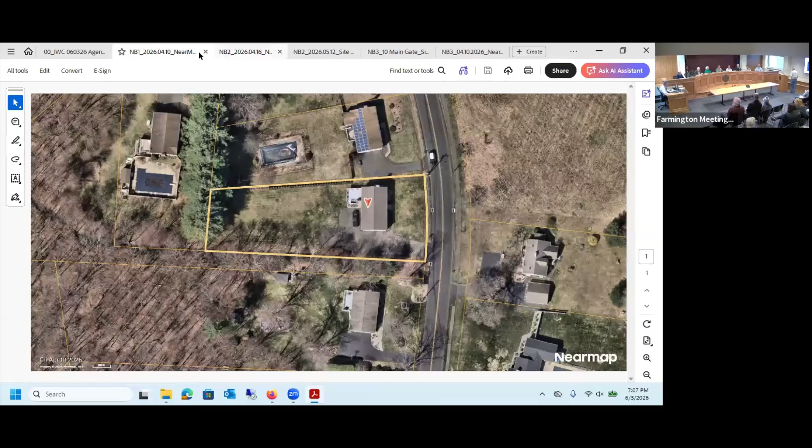Good evening, Jeffrey Moore's, 152 Wood Pond Road. I have an application in to put a maintenance path in our backyard. I think you already have a summary of it. We're on Woodridge Lake. It's about a 23-foot drop from the patio down to the shoreline. We've controlled for erosion by putting in various interrupters, terracing, I guess you'd call it. The drawback with the terracing down on the...

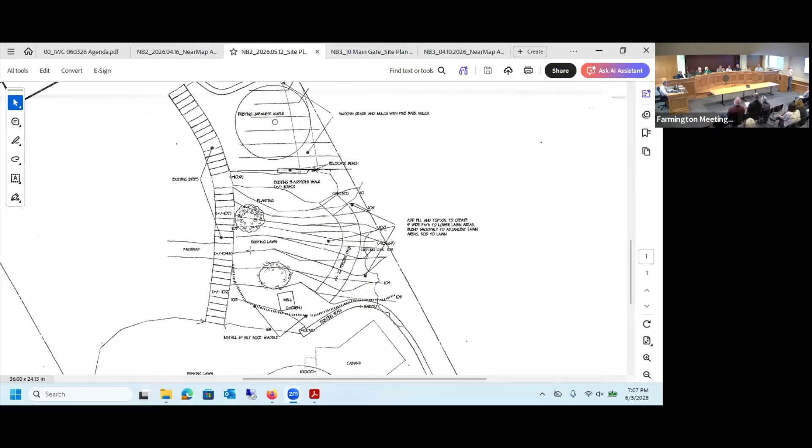Not sure, I can't really make it out too well here. You look behind you, behind you too. You can see to the right, there's a crescent-shaped proposed path.

We need that because we can't get lawn equipment down there. As we get older, we've looked into having the lawn done, and none of the landscaping people will do it because they can't get equipment down there. One of the other things is we get loads of snails and algae, waterlogged, and we have to bring them up the steps. So putting in this crescent-shaped curve would give us enough of a path that we could bring something wheeled, like a wagon or a jitney. So that's what we're asking for.

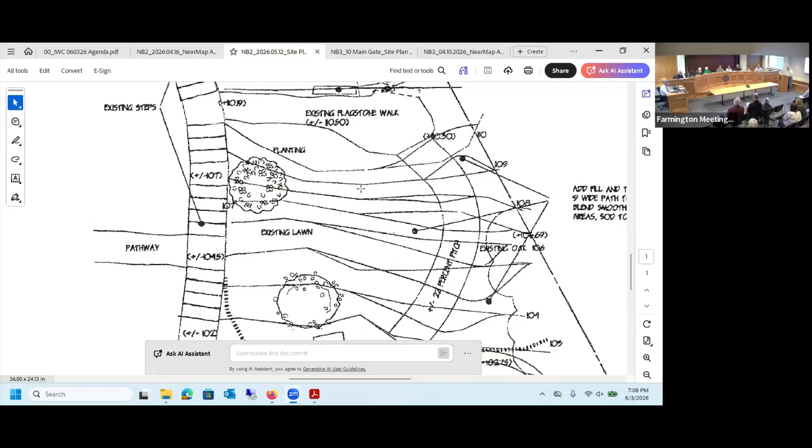The second part is to install a dry well at the end of the driveway. It wasn't clear as to whether this was even in wetlands—it seems to be right on the border, but we've applied for it just to be safe. We're getting runoff from the adjacent property, and we also want to repave our drive, so we'd like to put the dry well in. Thought it'd be a good idea to put the application in at the same time we're doing this.

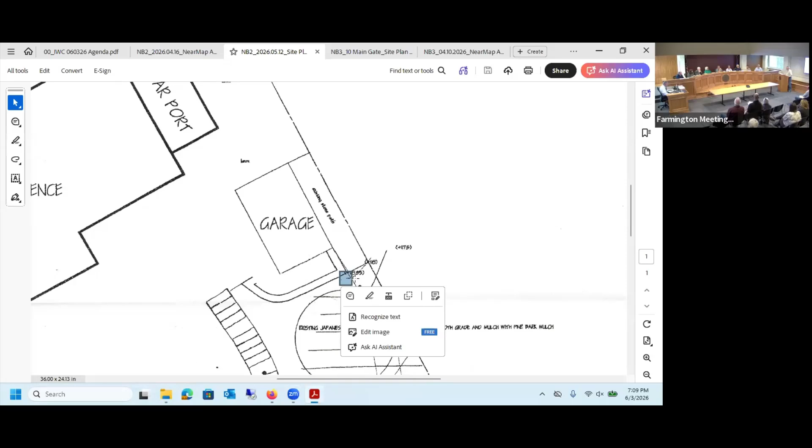Okay. So there isn't going to be any excavation to change the elevations of the ground to make the pathway fit. The only excavation will be for the dry well at the top. To put in the path, we'll be using fill, approximately 30 cubic yards, according to my landscaper. Okay, and that will be sodded afterwards, and of course we'll put in erosion control until that's all done.

What is the pathway going to be? Is it grass or is it stone? Yes, it will be grass. Okay.

And the drainage, I saw you had a detail of the drain. The contractor is going to be putting in that drain as well. Yes, we'll probably do it at the same time. Actually, it's a matter of getting things coordinated. We don't really need the drain until we do the driveway, but we don't want to put a fresh driveway down and then bring in the equipment to do the pathway.

So we're looking hopefully at the possibility of putting in the drain. He can use the soil from the drain for the pathway, which means he won't have to lug that around, won't have to lug it away, and we won't have to bring in additional fill. The question is, I've got to try and get this coordinated with the paver to make sure he gets the location correct.

Okay, and the... well, I'm not sure about that. Let's pull in the commission and see if they have any questions. Andre? Pretty straightforward, I have no questions.

Okay, Rich? On the drawing here, it says you're going to have a 22% pitch on your sloped surface. That's what he's calculated, yeah. I'm not sure that at 22% pitch, the sod will stay in place unless you do something to reinforce it. I can take it up with the landscaper. He's done work for us twice before. It's been satisfactory, and he's done quite a bit of work around the lake as well.

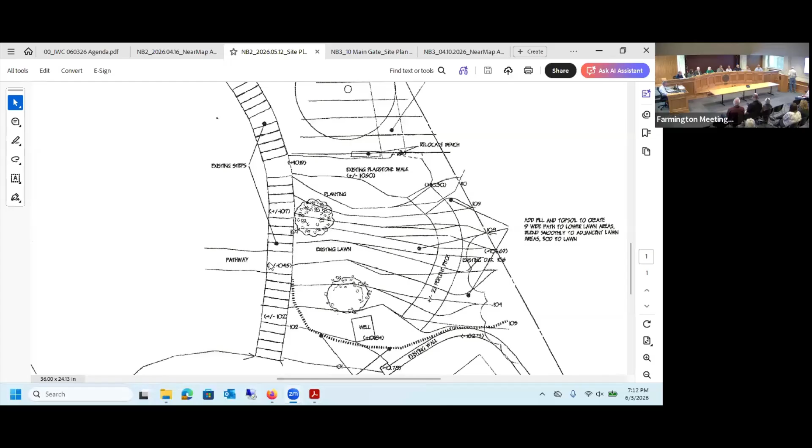Okay, Robert? A few questions. Where is your septic system located? The septic system is... yes, it's on that area, the other side of the lot. Not yours. Yeah, no, that's not a problem.

Okay, and similar to the concern that was raised by Commissioner Berling, I think you probably have to look at a geotextile mat or something, because that's a fairly steep slope. And should the application be granted, if you have problems with ongoing erosion, you may need to switch to a different process. Yeah, that's something that I will be concerned about as well.

And historically, how have you gotten the equipment down there? Some carry downstairs? Well, before the ground cover grew in—well, I was quite a bit younger then too—you could get a wheelbarrow down and get a push mower down. Now it's overgrown so much, we have to run the push mower down the steps, and it's like 39 pieces of stone. So it's getting tougher and tougher.

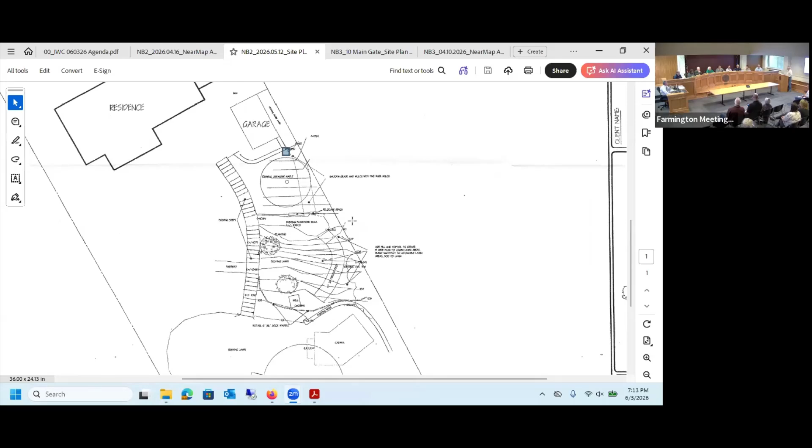Understood, thank you, that's all my questions. Thank you. Okay, Dave Fox, how far is the lake from the end of the path? Between 44 and 50 feet. I think Mr. Sear estimated 50 feet. I think we taped it off at a little over 44. Okay, that's all, thank you.

Mark? You mentioned dealing with erosion. You would have to use erosion control in the area where you're going to be doing all this fill-in. What type of erosion control are you using? I think they call it wattle—it's straw mats that are sort of wrapped up. I was going to say that's probably what you're going to need. Yeah, just, if you say it's a steep pitch as it is, that's what you need. Okay, thank you, no further questions.

Okay, Alana, I have no further questions. Frank? No further questions. Okay, no further questions. The chair will entertain a motion to accept the application. So moved. And a second, please. Second. All those in favor say aye. Aye, aye. Opposed? Abstain? Motion passes.

How do people feel about the site walk and the significance? I'll start with Andre. I think that's a little significant pitch, but I don't think it warrants a site walk. No significance, no site walk. Rich? Yeah, I would agree. Okay, Mark? Same. Robert? I'd be okay if we don't do a site walk, but given the steep slope and relatively close proximity to the lake, I would actually favor a site walk. Would not be concerned if we did.

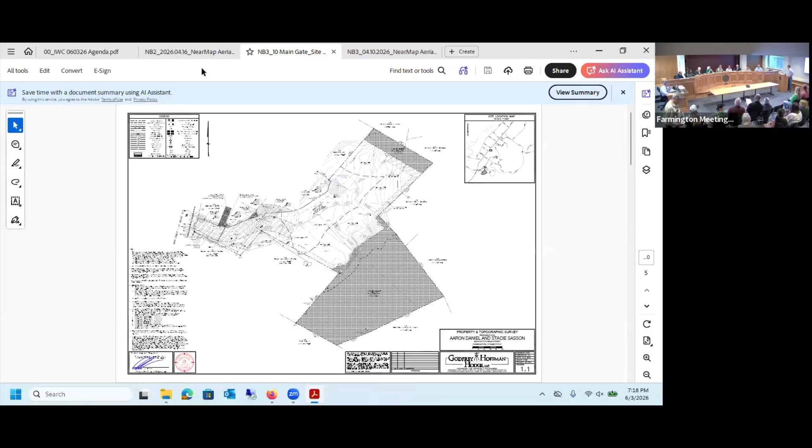All right, 10 Main Gate, Jason Levesque. Bruce, Lance, members of the board. I'm working as an agent for the current owners. It's been quite some time since I've been here. If you recall, I proposed a 4-house subdivision there - some of you may have been on the board.

It's a new proposal. I since withdrew the subdivision, and I'm now proposing a single family house with a pool house, a pool, and a septic system. So we're not doing sewer, and we're going across the culvert - only a minor amount of utilities going across that culvert in front.

The site plan doesn't have that on there - I think Bruce put that old plan in there. Sorry, I think you put the old plan in. Yes, I did. Do you want that up now? Yeah, because it's going to be a minor disturbance in the upland going across the culvert.

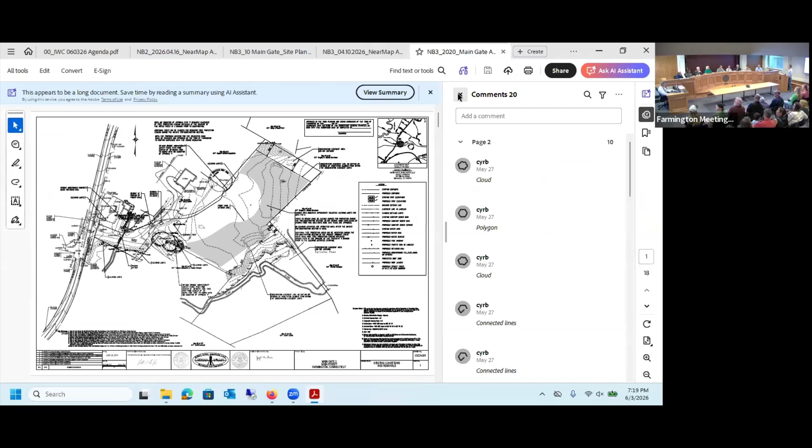So from Main Street, I'll be bringing in water and gas - those are stubbed in currently. So I think we calculated about 0.033 of an acre disturbance there, going across on the existing driveway, and then obviously paving the driveway up to the proposed house. So you can see a big reduction in disturbance in the upland review compared to the old proposal.

The existing conservation area stays in place, so no disturbance in the actual wetlands. Bruce, you can go back to the proposed site plan please. You can see that the dark dotted lines are the upland review right there. Most of the disturbance is the proposed pool and pool house - nothing touching the conservation easement, you can see that in the dark gray area. And even the septic system is out of the conservation and wetlands area.

I'm sure I missed a couple key points there, so if you guys had any questions for me.

What is the plan for the property area to the north - is there a future possible house placement there? No, we got rid of all the lots. After wetlands, when we passed the subdivision, we had the lots - now it's all been put together into one. So all of these lots here, 1, 2, and these will all disappear - so yeah, it'll only be this house along with the driveway to the house.

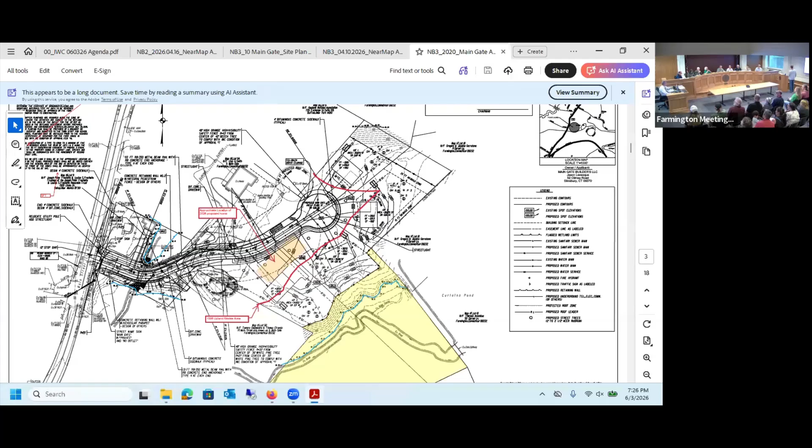So the septic system is where? Right there, right here. And then the infiltrations, the stormwater and roof drain infiltrate there's one on that. Yep, right there. Got it, great, thanks.

In the pool, does the pool have any underground drain? Is there any other point discharge? Anything below the pool, is that going into the infiltration? No, infiltration, that'll have to be emptied, pumped, and taken off site.

But you don't have any foundation footing drain, anything like that for the pool that has a point source? For the pool itself, not necessarily for the pool itself.

We have yard drains, so kind of, see the grassy area, maybe to the left of the pool. So yard drains in there, right?

Because obviously we're going to keep the grades somewhat level, so yard drains there, yard drains there, corner there, all leading into infiltration.

And then roof leader and everything going out to the front. Great, thank you. David, no questions.

Did I ask you, Mark? Yes. Yeah, okay, I'm sorry.

Alana? So the paving around the pool, it looks like, is that brick or? More than likely, just for purposes of the plan, it'd be like a paver or a natural stone. More than likely it's going to end up being a natural stone.

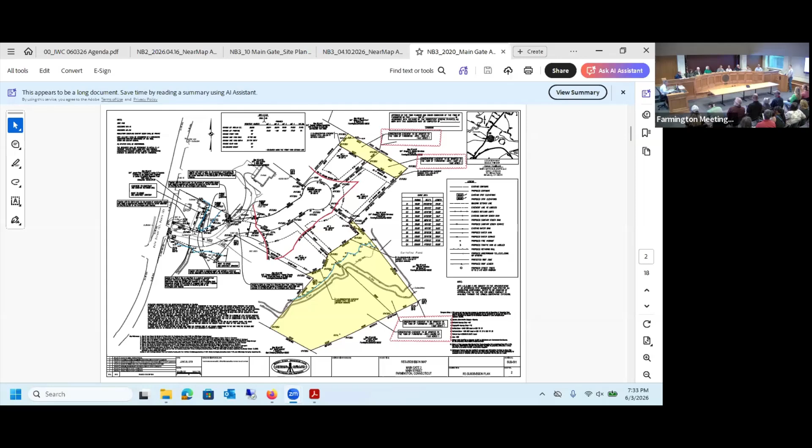Would it be possible to get the house roughly staked out? Yeah, I'll get it roughly staked out. That way you guys can look at it. Do you want the full box, like the pool house? That probably makes more sense - just the four corners of the house and the pool house.

Did you ever mark out the conservation easement in the back here? No, that never got done. It's delineated pretty well with the topo there. So I just didn't know if you already did it. That'd be a great way to work our way back from. But honestly, a stake or two, or a flag there, would probably be helpful.

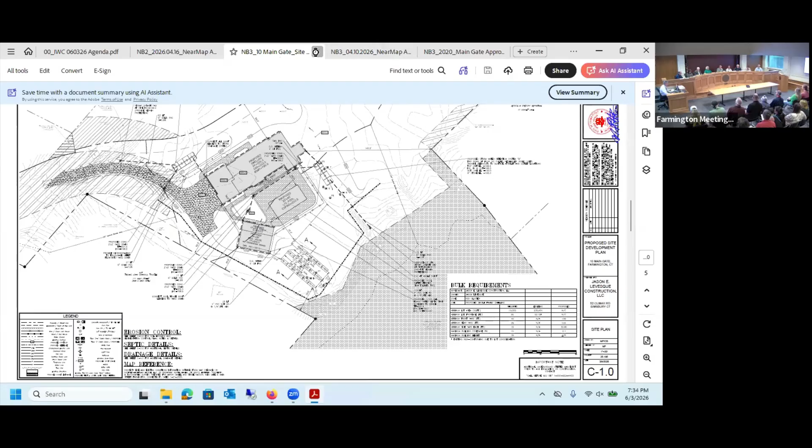We'll see you tonight - vote on the application. All right, you ready? Okay, we're going to reopen the public hearing. First one on 598 Plainville Avenue, JBS Developers.

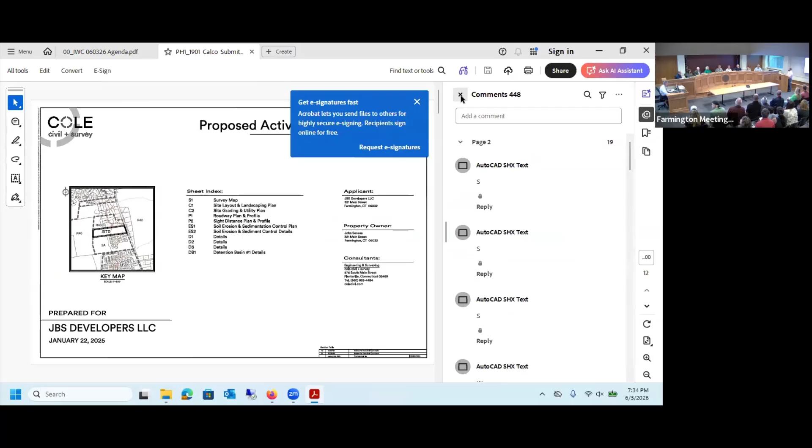Good evening, for the record, Brian Panico with Cole Civil and Survey, here on behalf of the applicant, JBS Developers. Just a quick recap - I believe at the last meeting we had gone through everything and answered all the public's questions, and we're just waiting on a referral from conservation.

You haven't made any updates to what was presented at the previous meeting, right? Correct. Okay, are there any questions? I won't bother to poll everybody, but are there any questions? Did we resolve the question of the elevation of the houses versus the water table? There was some question to that. That was actually included as part of the comments - there were some suggestions to tweak the house elevations on one or two lots. There's no questions from the commission.

Are there any public comments on this? Which one is it for? 598 Plainville Avenue. Any questions, any public comment for 598 Plainville Avenue? Are there any comments online for 598 Plainville Avenue? Got their hand raised? No one's got their hand raised. No one does.

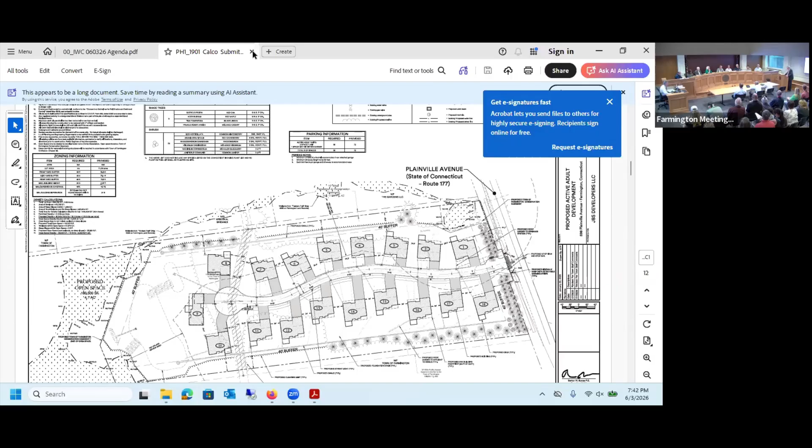You'll remember the hearing was opened on April 15th, continued on May 6th, again on May 20th, and again to tonight. We've provided Bruce with a written extension of time until your next meeting on June 17th, in which to close this hearing. Since the last hearing, we have submitted revisions to the plans.

We've also addressed comments received from the staff, the commission, and the public. Solli Engineering has revised the stormwater management plan to incorporate the so-called jellyfish system referred to at the last hearing, and provided detailed written responses to Bruce's staff comments. Bruce just finished reviewing those at about 5 o'clock this evening, so we haven't had a chance to look at those yet.

We'd like that opportunity, and certainly the intervener, the public, and the commission will need that opportunity too. So that's the request to keep the hearing open. William Kenny Associates has also submitted a wetlands mitigation plan, which came in Monday, with a detailed written report addressing comments received from the commission, the staff, the intervener, and the public, including further investigation of the presence or absence of the lizard's tail on the site, which was of interest last time.

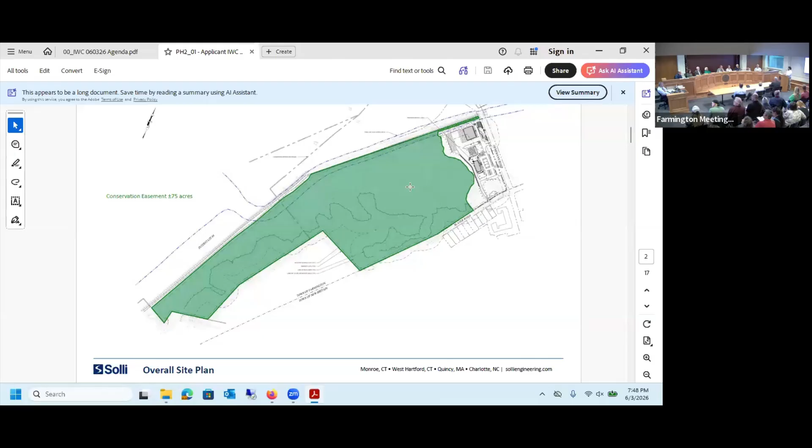So Bruce, if you could go to the next slide, please.

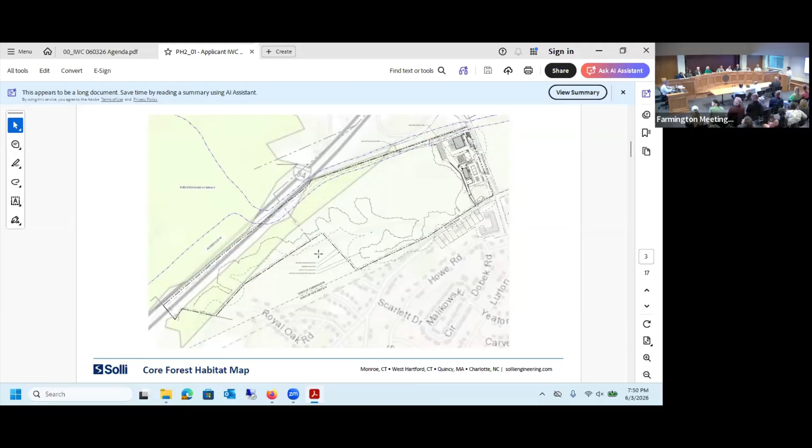Bruce, can you go to the next slide, please? So now I'm going to get into some of the changes that have been made to the design based on the previous plans we submitted. These plans were submitted last Friday, and the revised plans included some alterations to where the roofs for the gas canopy as well as the refueling station drain.

Based on the commission's suggestion, we have included the refueling station and the gas canopy roof drains into the recharge for vernal pool 1 that is down to the south. I know originally both of those roof drains were leading into our stormwater management system. By doing this, we are able to contribute to the hydrology of this vernal pool without reducing it as much as we were previously.

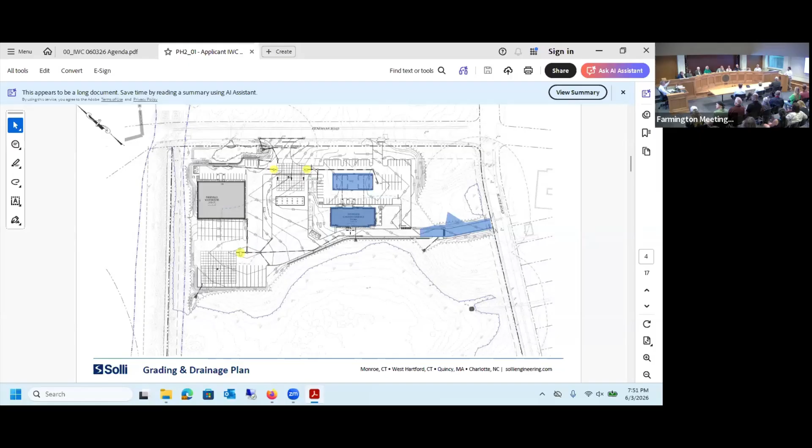Similarly, along the Slater Road access drive, which we talked about last meeting, we're including a tree filtration system that is capturing the runoff from the road portion. In place of what was previously there, a catch basin tied into the overall stormwater system. Again, this is also going to contribute to the recharge of vernal pool 1.

One of the other comments brought up by the commission at the last hearing was about the Slater Road discharge currently existing on site. There's an existing 30-inch pipe coming from New Britain stormwater that feeds into this property, and this water runs into the vernal pool area. We'll look at the watershed map again later, but this is the main contributor to the water source of this vernal pool. When we talked last time, the question was raised how we can provide some form of treatment to this water being directly discharged. So we are proposing to improve the existing conditions there. I'll get more into that design later.

The final changes we've been discussing previously were the replacement of the hydrodynamic separators with jellyfish filters from Contech. These have been fully integrated into the stormwater design now and included within the resubmitted drawings. There will be 3 of these filters on site: one for the large underground retention system at the back of the warehouse, and 2 at the front underground system.

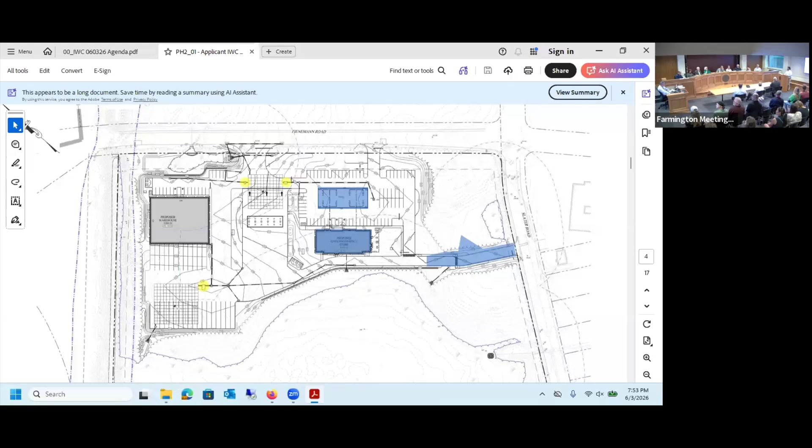The one other area I'd like to touch on is the area along Fienemann Road, that wetland pocket. One of the staff comments was about adding an additional catch basin along Fienemann Road to reduce the drainage easement needed. So I want to highlight that we did include an additional catch basin on the opposite side of the driveway from the previously proposed one. This captures road runoff directly from Fienemann Road, going from one catch basin into the other and then into the sump we're proposing as part of this wetland mitigation, which will be touched on more later. We're capturing this runoff from Fienemann Road, and the intent is to help improve this runoff, which is what's leading toward the mitigation efforts for this wetlands pocket.

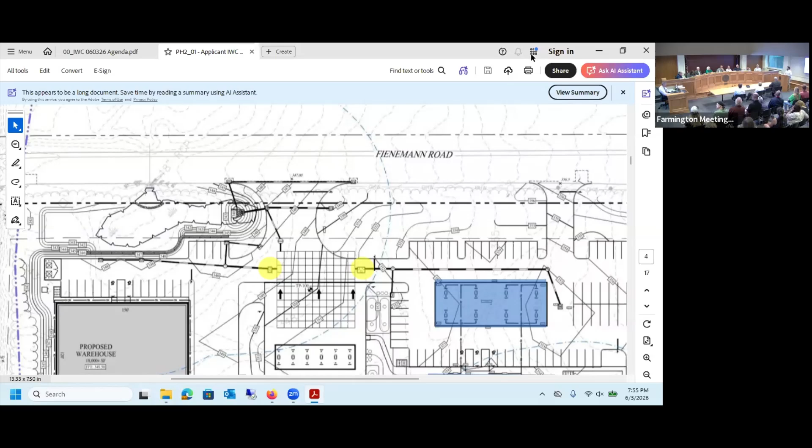The stormwater runoff from the site itself is going to be pre-treated and go through the retention system. We are going to maintain or reduce the overall runoff from the development before it gets into that wetland pocket. The intent behind this wetlands is there was an opportunity here to improve the wetlands that currently existed. As many of you saw on the site walk back in March, there was definitely a bunch of trash and debris, and the wetlands was not in the best condition. Our efforts here are to help improve that, as well as treat some of the Fienemann Road runoff coming from the town road.

Chairman, point of order. Okay, let's keep our comments to ourselves, please. Okay, thank you. Bruce, if we could go to the next one, please.

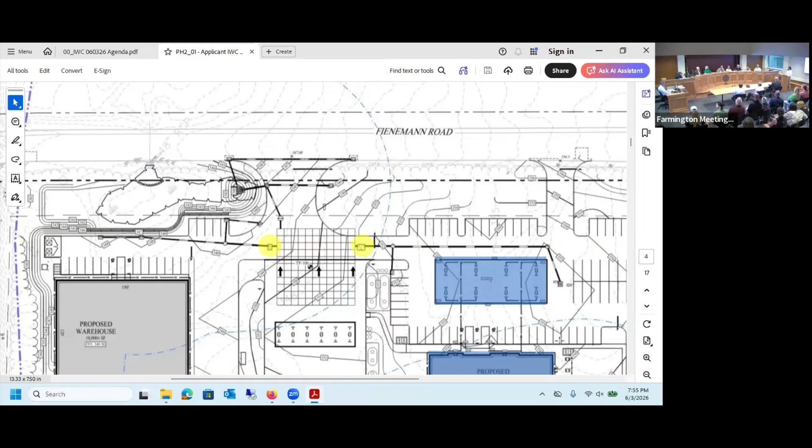I wanted to touch on the jellyfish filters we talked about at length at the previous hearing, and some of the approvals they've gotten at existing sites in the state of Connecticut where these units have been approved, installed, and are functioning. First off, these units have been tested by the Washington State Department of Ecology to meet their technology assessment protocol, called TAPE testing, and they have approved this unit through TAPE testing to a general use level designation. There are different designations for general use, conditional use, and some still preliminary and in testing. For this specific instance, they are looking at emerging stormwater treatment BMPs and testing them to see if they can be used, given conditional usage, or if they still need further testing.

The jellyfish filters themselves have been given that general use level designation. Per the Connecticut Stormwater Manual, any proprietary BMPs certified by TAPE for general use level designation, GULD, for pre-treatment and/or treatment and/or basic treatment are suitable for pre-treatment and treatment respectively in the state of Connecticut. So based on the GULD designation given by Washington State, these units are approved for use in the state of Connecticut.

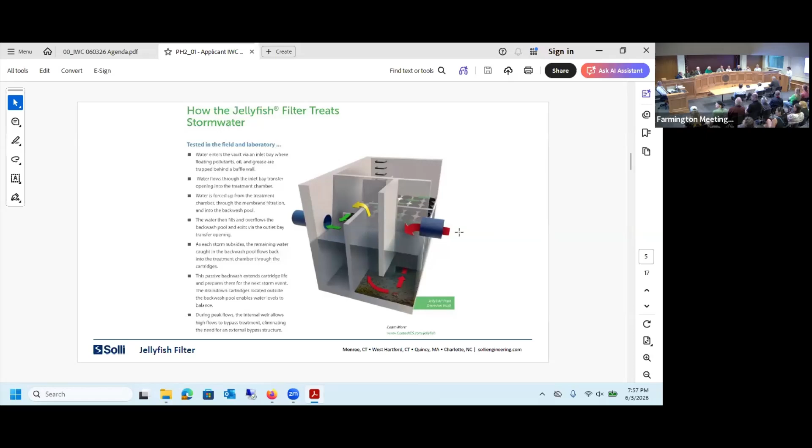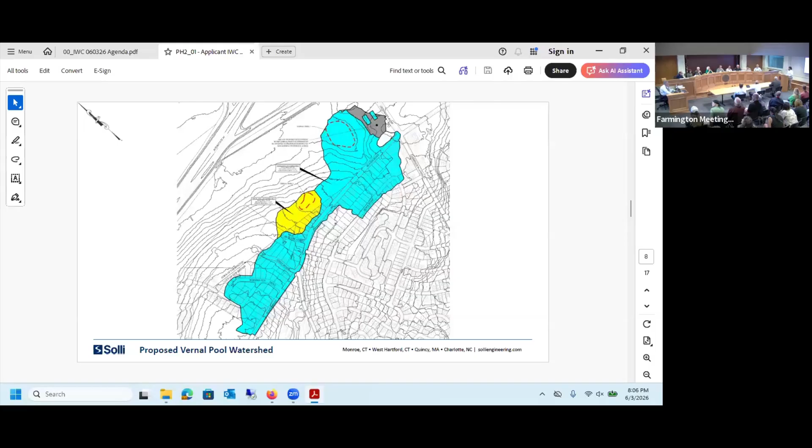Currently it's silted on the bottom. When I was out there, it was about 1.5 to 2 feet deep as a plunge pool, and then off to the left it flows into a stream.

The intent would be to bring this up to DOT standards for a scour hole, which is another term for plunge pool. So we would be increasing the size of the pool itself, as well as adding riprap, which would help with capturing sediments, energy dissipation of the water coming out of the pipe, and soil erosion control.

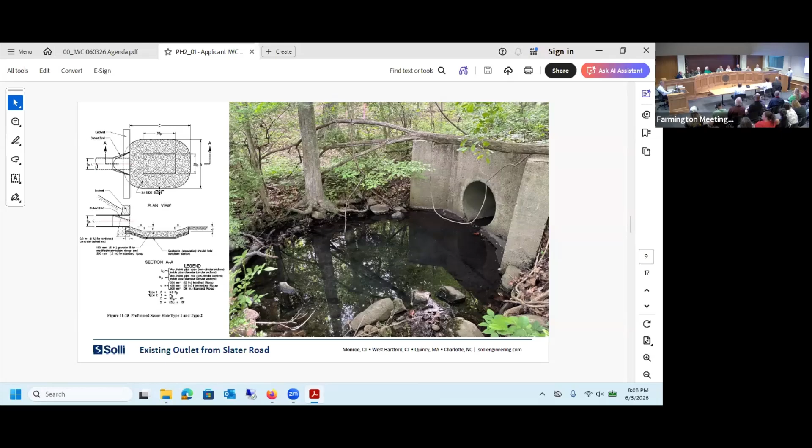Huh? Is it? All right, okay, I'll keep going then. The next one after this?

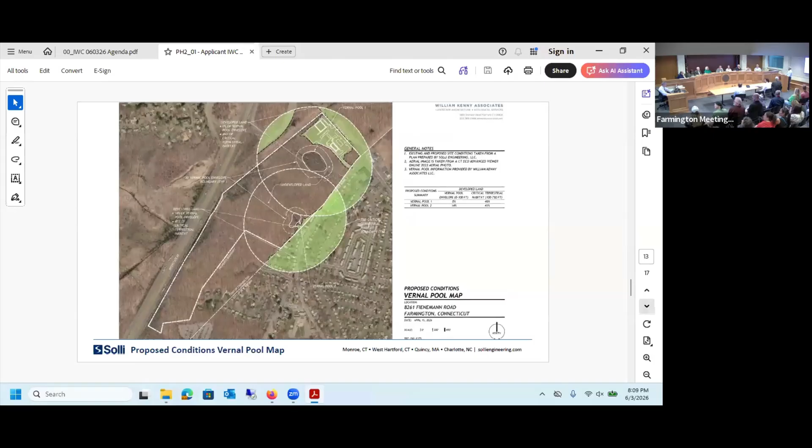Nonetheless, the modifications to the mitigation plan were very minor, based on the town comments that we had gotten. It's really just two. We added all of the different species codes to the trees and shrub plantings that we're proposing, as well as fixed one of our typos related to grading in the wetland area to be enhanced. And then we fixed up our wetland mitigation, wetland creation, and wetland alteration numbers so that we are in line with the most recent plans that Solli has. That's about it for the mitigation plan.

In addition to that, we submitted a pretty large and thorough report. We took into consideration comments that we received from the commission and the public, and packaged all that together. There's really four primary items in that I just want to go over and summarize tonight. If I don't answer any of your questions on those, I'm happy to go a bit more in depth.

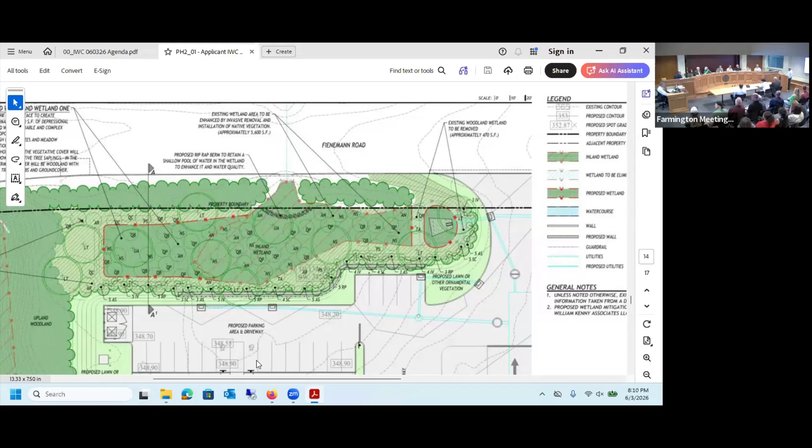The first, we'll go back to the on-site vernal pools and their buffers. To recap, we have 2 tier 1 vernal pools on site. The best development practices recommend that there's no development in the VPE and that you limit the development in the CTH to 25%. Unfortunately, even under existing conditions, we cannot meet those recommendations, and this is due to offsite development that has taken place. Yet we're left with 2 high functioning vernal pools, because research has shown that you can increase VPE development up to 25% and CTH development up to 50% and still have a functioning vernal pool, functioning at tier 1 as well.

Vernal pool 2 is essentially doing this right now at those VPE and CTH limits. Our project is going to have one impact to the vernal pool buffer, and that is the development of the vernal pool 1 CTH. We're going to rise that from its existing state at 33% developed up to 46% developed, and it will maintain a completely undeveloped vernal pool envelope. Even with the 46% developed CTH, which is only 5% higher than vernal pool 2, we're under the 50% threshold that's needed to support a tier 1 vernal pool. On top of that, we're including several vernal pool best management practices listed in the 2002 Klemens documentation. Those include the use of low spillage LED lights, Cape Cod style curbing, as well as maintenance of a forested connection between both on-site vernal pools as well as on-site wetland habitat. For those reasons, we maintain our conclusion that the project will not adversely impact on-site vernal pools.

The second item. Mr. Chair, before Jackson moves on, just for the benefit of the public, if you could just clarify what the VPE and CTH is. Yes, apologies, understand, for the benefit of the public. Thank you.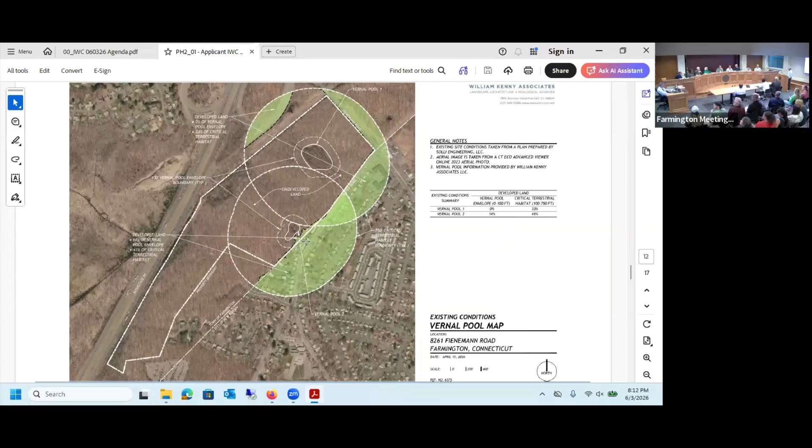The vernal pool envelope is the VPE. That is a 100-foot buffer around the outside of the vernal pool, shown by these smaller circles there. That is the primary habitat responsible for the organic nutrients that essentially support the web of life within the vernal pool. Broader than that, the larger circle, that is the CTH, the critical terrestrial habitat, and that is where vernal pool obligate species spend a majority of their lifespan when they're outside of the pool during the summer months, overwintering. Essentially, that's their habitat when they are not breeding.

Thank you, Jackson. Mr. Chair, thank you. The second item that I'll touch on is terrestrial spotted salamander habitat.

Spotted salamanders spend a majority of their time outside vernal pools, like we just discussed with the critical terrestrial habitat. They're mostly burrowed underneath the soil a few inches or under leaf litter, coarse woody debris, or surface stone coverage. It's widely studied and concluded that these species prefer to do this in mature, closed canopy, broadleaf deciduous woodlands. They like moist, cool soils during the summer, but not moist enough that they will freeze in the winter. However, terrestrial habitat selection primarily revolves around the forest substrate composition—the leaf litter, the woody debris, the rocks—as opposed to the actual soil drainage classification. Studies show that the presence of leaf litter, woody debris, and surface stone are the primary motivator for spotted salamander habitat selection.

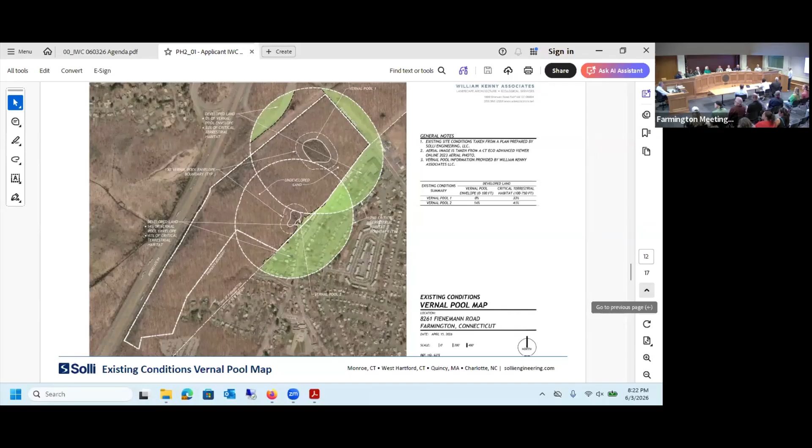On our site—Bruce, could you go back to number 2 in that presentation, just page 2 of the document—on our site, which, mind you, is over 80 acres in size, we are proposing to develop about 5% of the total land mass of the parcel. That is well below the DEEP stormwater manual's 10% recommendation for maintaining good to excellent wetland conditions.

But still, looking at our 80 acres as a whole, we recognize the importance of vegetated wetland buffers. This is why we concentrated the development to one spot on the property, ensuring a vast majority of all wetland boundaries have large vegetated wetland buffers, well over 100 feet from the development. It's only in this northernmost portion of the site, along one wetland edge, that we are encroaching into that distance, and for that reason we are providing top-of-the-line BMPs.

So I'll wrap it up by saying this: I ask that when you look at these plans, it's very easy to only see the proposed development, about 6 or 7 acres of land in one small portion of the property. But if you look broader, this is not just a gas station and a warehouse. This is an applicant treating stormwater from public roadways that are currently polluting Batterson Pond.

This is preservation of 75 acres of contiguous forest, high-quality wetlands in a rapidly urbanizing town. And if you take a step even further, this is the long-term preservation of 75 acres of the Batterson Pond watershed. That's all I have. Thank you.

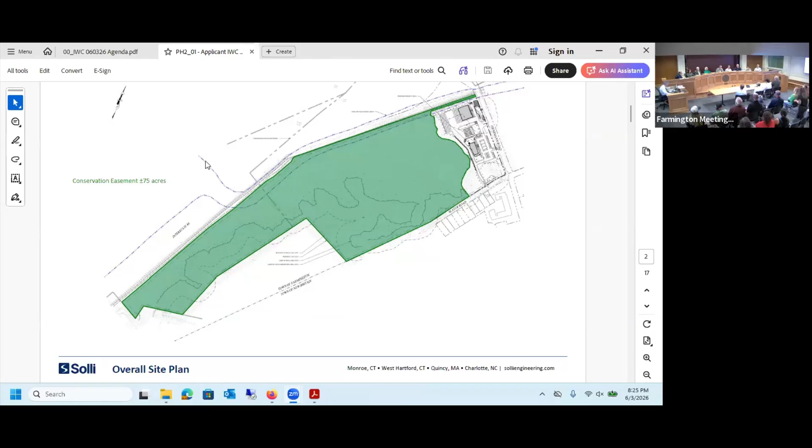Good evening, I'm Stephanie Roman. I'm the property owner of 1292, 1294 Slater Road in New Britain, Connecticut. I'm the intervener in this proceeding. Can't hear me? Sorry, I'll talk louder. You can go to the next slide.

So I just wanted to start off with where I left off at the last hearing. I talked about the CTDEP reports, which Bill Kenny and Associates just mentioned. These reports speak for themselves, so I'm not going to go into elaborate detail here, but I did want to reiterate at a high level what these reports recommended and that the applicant seems to be disregarding. For one, these reports were intended to help protect the Batterson Park watershed from further development, including the description regarding Subbasin 3, which encompasses this property, and the 2/3 drainage to that pond from the property.

The reports called for aggressive watershed and in-lake management, to achieve no net increase in loading, and to take whatever actions necessary to limit non-point source contributions. So while there was talk about the TMDLs, it's a misconception to say, well, our BMPs are 50%, so we're complying with the TMDLs. The whole point of the TMDLs was that the pond is over polluted, and we want to mitigate that.

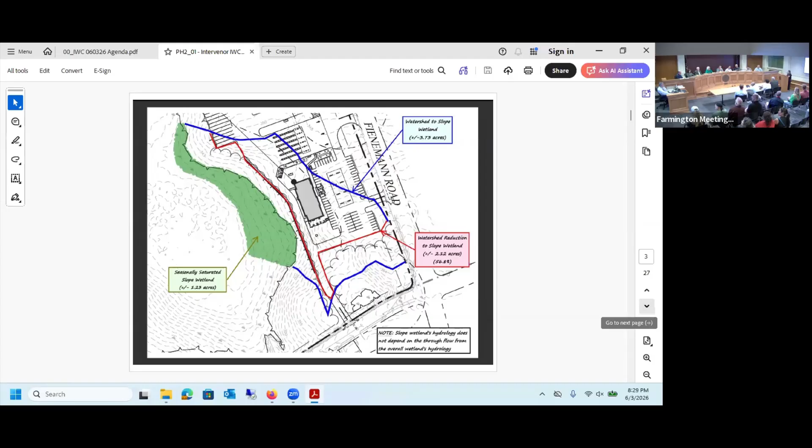So I just wanted to turn to the ConTech Jellyfish Filter specifications. I did submit a copy of those specifications to the record, and I also provided a copy of the user manual. I think the main thing to keep in mind—while I commend the applicant for trying to find an innovative solution, and I appreciate there might have been some use cases in Connecticut—I just don't think they're appropriate for this type of intensive use near these wetlands, near a pond.

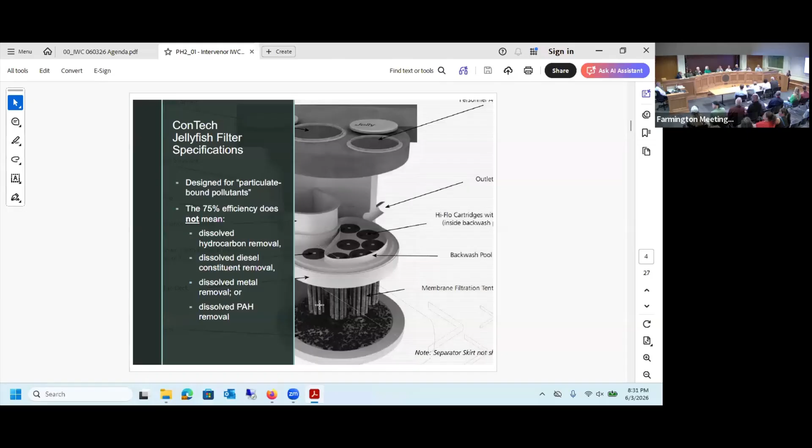One important thing to note in the specifications: it does mention in section 3 that the filter is really designed for particulate bound pollutants. While that's significant, it's not the sole issue. We have a lot more concerns about dissolved pollutants from this intensive hotspot use case—high intensity vehicular and fueling use. Stormwater from such areas includes chloride, nitrate, soluble phosphorus, dissolved metals, petroleum hydrocarbons, PAHs. If you say 75% efficiency, we're talking about particulate bound pollutants, not all dissolved pollutants. You just can't make that broad assumption.

So more from the specifications—this is a screenshot of the actual specifications. The specifications mention a 55% total removal of phosphorus. I know the website mentions 75%; that was actually from the Washington study that was discussed just now. But there are no similar studies conducted in our region, such as the University of New Hampshire Stormwater Center. Therefore, we cannot rely on testing done outside of our geographic region, which would not be based on our specific weather and precipitation patterns.

So just to quote from the 2024 CT Stormwater Quality Manual, if you're going to rely on proprietary best management practices, you can't assume efficiency if the performance testing was not done under similar conditions. As I mentioned, Washington-based field studies just aren't going to be similar to our conditions here in Connecticut.

I wanted to highlight the other specifications on how the number of cartridges should be used based on the surface area. I could not decipher from the plan how many cartridges were in each of the units. The length of the unit basically determines how much surface area is being treated, so if that's a clarification point, I'd appreciate it.

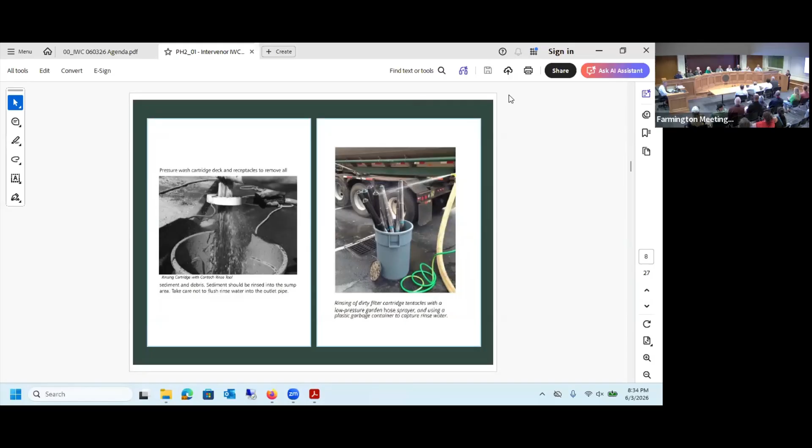Do you have any questions for the applicant? I do. So for the lizard's tail survey, is there a reason why only the area around VP 2 was surveyed? Okay. And I had one more question, sorry.

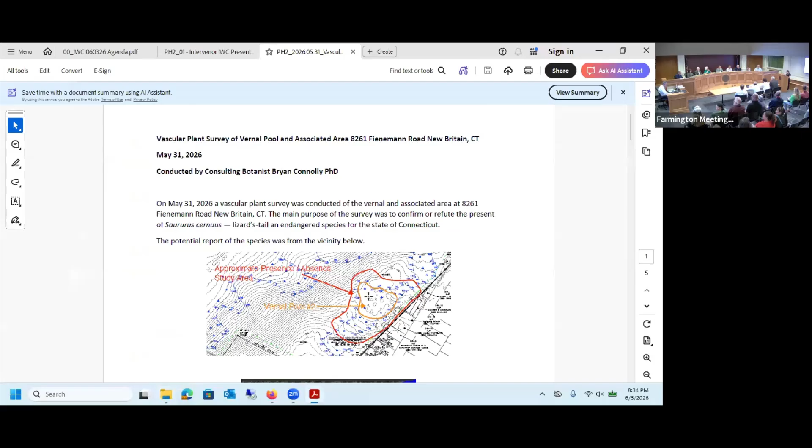Are you a soil scientist? No, but... Are you a biologist? The reports are in. The reports are in. All right, let's not. Hey, quiet.

Quiet. All right. No, he has a right to ask the intervener. The intervener has a right to ask them questions. He has the right, but I would ask you to keep the specific questions focused. All right, hey, if the public persists on this, we're not going to be able to continue. No. Do you want me to end? No. Listen, all right, but let's try and keep it specific to the project.

Yes, I would like to know if the intervener is a biologist. I already said that I'm not a biologist. I said I'm not, but I also said that I have experts' reports that have been submitted in the record that support all of the points I made. Well, you said that testing outside of our region isn't acceptable. Do you have an expert background in science? No, I took that from the 2024 Connecticut Stormwater Manual. That's just factual information from the stormwater manual that I quoted.

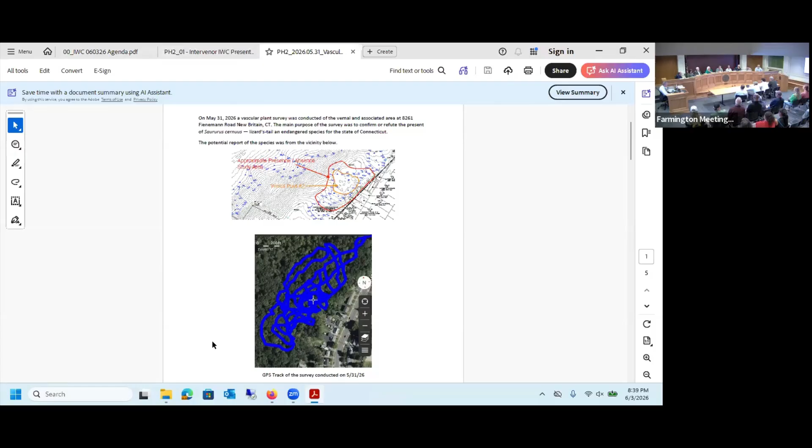Dave: A minor question. The 1 foot high curb was depicted at the south end of the parking for the warehouse, but I had asked about extending that over to the wall area. It doesn't show that on the plan, but yes, just a reminder, that is the intent, to have it wrap around to the wall. Okay, that would be good.

And one more thing, I think the intervener brought it up last time. In terms of the watershed for vernal pool 1, the percentage of the whole was given as what's going to be lost. But she had made the point, which I thought was a pretty good one, of how much of the watershed is now developed, and how much of what's lost is all from the undeveloped portion. So if you could have a ratio of before and after developed watershed and undeveloped watershed, it might provide some information that would be good, considering that the undeveloped portion would be more natural runoff and the developed portion would be urban runoff. So I think that would be useful information. That's all I have.

Alana: Yes, my question is for the engineer. So with these jellyfish filtration systems, these are proprietary, correct? Right. And so their cleaning and maintenance, does that require a professional from Contech to come out and do maintenance on them? Not from Contech directly. And so if Contech were to ever go out of business, would you still be able to get maintenance? Okay, that's all my questions.

I want to begin with Batterson Park, even though it's been talked about many times. Just across the street from this proposed development, it's one of the region's most important environmental and potential recreational resources. The state of Connecticut has invested $10 million to restore Batterson Park because it recognized the ecological value of this landscape and the importance of protecting it. State leaders, many of whom are here, have publicly supported efforts to secure Batterson Park's future as a regional asset.

And a destination for recreation, conservation, and most importantly, environmental stewardship. Yet at the same time, this commission is being asked to approve a project that would introduce a diesel fueling facility, an 18,000 square foot warehouse, or tractor trailer operations, continuous commercial activity immediately adjacent to the same watershed. Those two visions are fundamentally incompatible. One vision is restoration, the other introduces long-term environmental risk. So from the town of Farmington's own website, your mission, I quote, is the preservation and protection of the wetlands and watercourses from random, unnecessary, undesirable, unregulated uses, disturbances, or destruction.

And to protect, preserve, maintain, and use inland wetlands and watercourses by minimizing their disturbance and pollution. I believe this commission should ask itself one simple question: how can Connecticut justify spending $10 million to restore Batterson Park while simultaneously approving a major diesel trucking facility directly upstream of it?

Now, there's a broader principle at work here. Throughout human history, we have constantly sought to bend nature to our will. Often that has been necessary. We build bridges to connect communities. We construct dams and levees to protect lives. We engineer solutions to overcome obstacles because the benefits to society justify that intrusion.